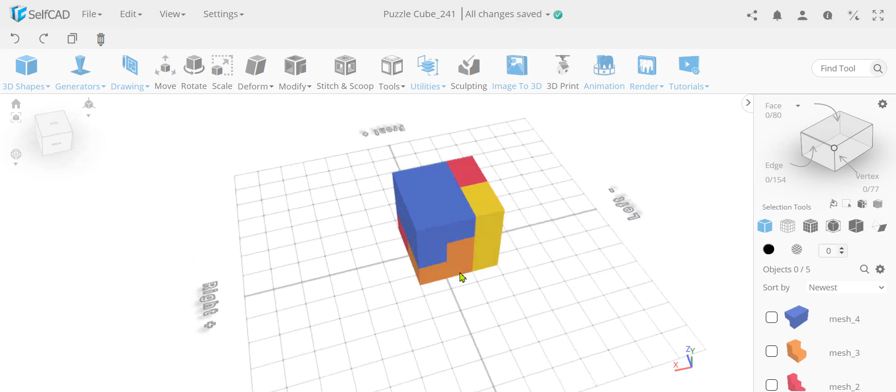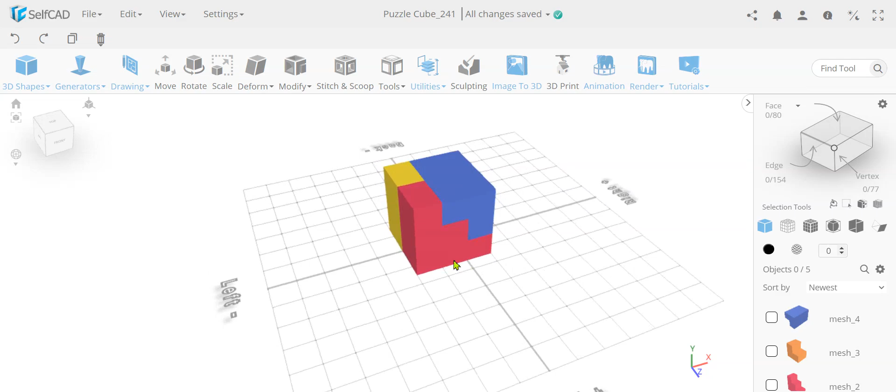So if you can see, this object is made of multiple pieces. Obviously that's a puzzle. You have the blue one which extends both sides. Then you have the yellow one which is just one corner here, one side. And you have this red one which basically extends all the side, this front side, I mean half of the front side basically. And then you have this one over here which is the bottom back side, and so on.

So the main idea is, obviously there's many ways you can do an object that looks like this. It's not a very difficult object, but the advantage of what this tutorial is doing is that it's actually going to create them all using a single profile. And this is going to be really simple. So let me get started.

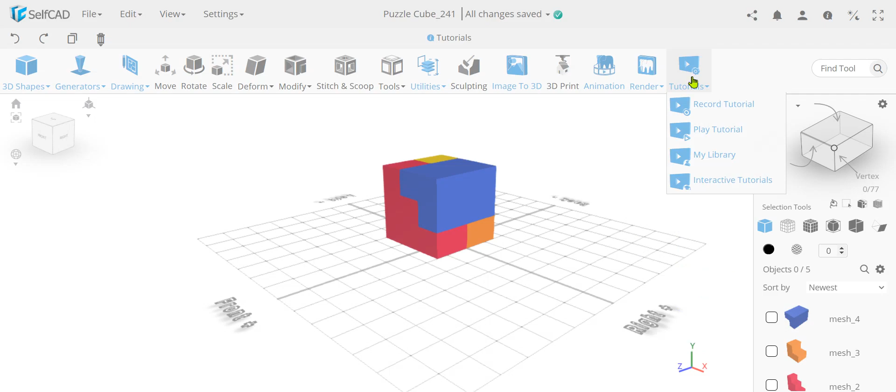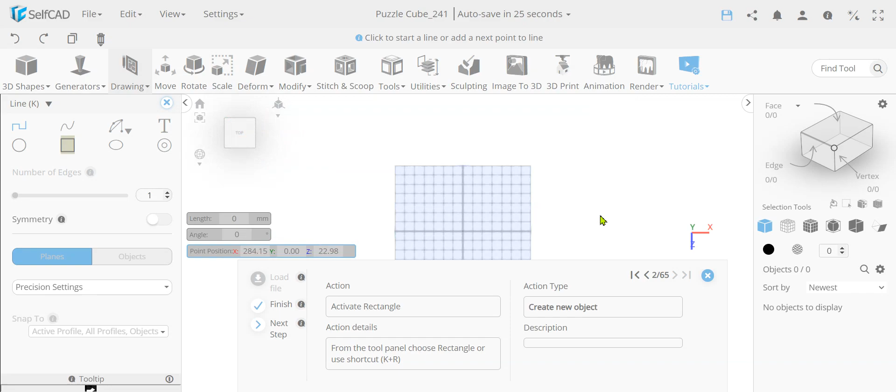I'm going to load this tutorial, click on play tutorial. I've already downloaded this tutorial, so I just need to find it in my downloads, and we start the tutorial. Okay, so we're going to start with a 3D sketch, and as I said, we're not going to use the basic shapes. For this tutorial we're going to use a sketch, but it's a really simple drawing, so it's a beginner tutorial. So the first thing we're going to do is activate the tool that we're going to use, which is a rectangle.

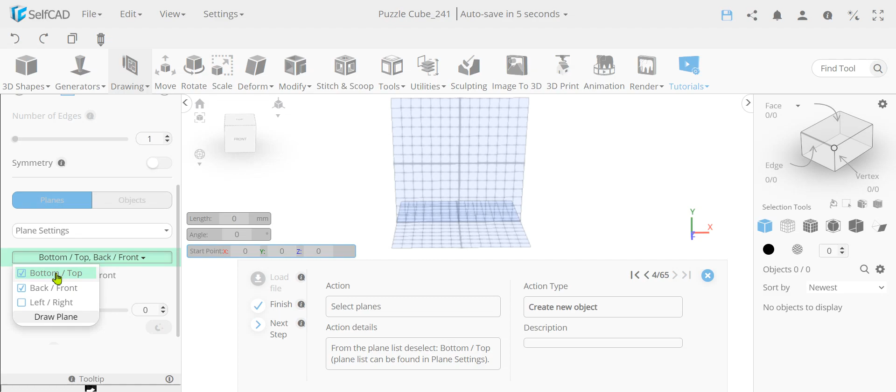And now we're going to set here the plane. What we want to do is draw on the back front plane. With this plane, I already looked at the top down. No, you want to use the front. I'm going to do it over here, and we're going to uncheck the bottom top plane. So we're basically going to use this plane. I can already zoom into this plane.

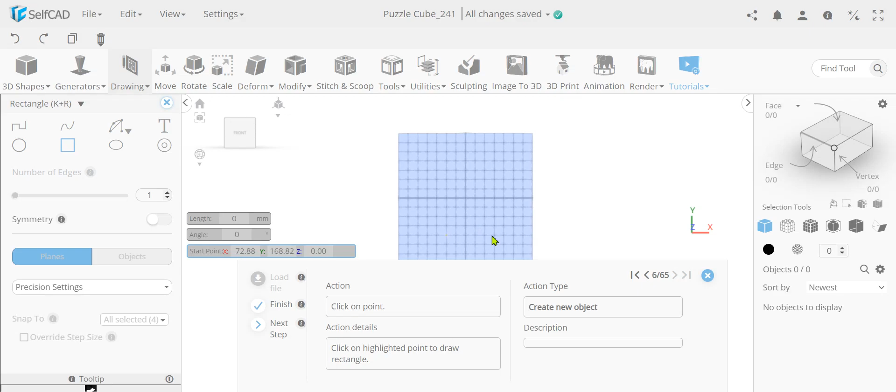And we're also going to change the precision. The default will snap to these three options. We want to add the fourth option, which is the grid vertices, so we will be able to snap to these grid vertices. And now it tells me to find a highlighted point. So I'm going to zoom in. You can see this yellow dot, and this is based on a grid vertex. So we snap over here, which gets the first starting point of the rectangle.

And now we need to snap to this point over here. So you have created this basic shape. Now we're going to draw another rectangle while rectangle is still on. And here's something interesting. We drew a rectangle the other way, but this rectangle overlaps this rectangle. And in SelfCAD, this automatically creates a split over here. So we drew a simple rectangle, but this will automatically split, and this feature will soon be used.

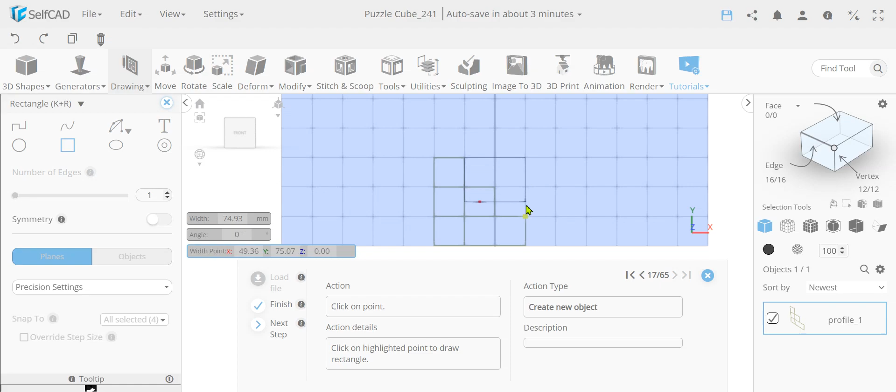And then we're going to draw a new rectangle over here, down to the bottom, and snap all the way here. So we have three rectangles, kind of like a ladder, staircase kind of sizes. And now we're going to draw another rectangle, click over here, and go down all the way over here. So all we did over here is we drew this profile that's kind of overlapping. It's a basic big rectangle that has in it this smaller rectangle, another smaller, another bigger over here, and so on.

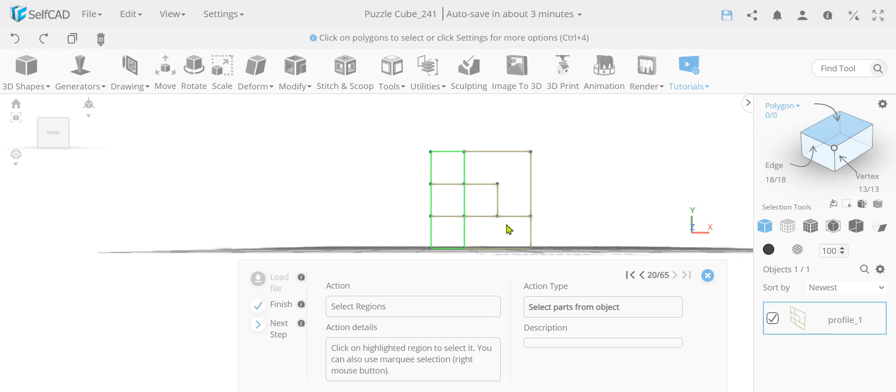Now we're going to activate the polygon mode. Actually it doesn't matter, polygon or faces, in this case they act the same on profiles. And we're going to select just this one side. This is actually what we drew first. I used the marquee selection because the tutorial knows what I need to do, but in reality, if you do this, you will select these lines as well, so you don't want to do that. But we selected what we drew first, and we're simply going to extrude it to create a mesh.

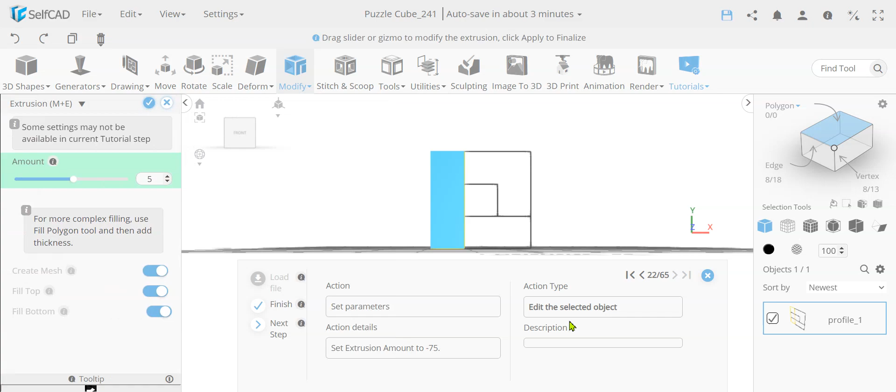But we're going to make them go the other way around, so we're going to make it -75, -75, and this means it goes out this way. And we're going to finalize it.

Okay, so now what we're going to do is simply color it with whatever color design I chose, and we're going to hide this away.

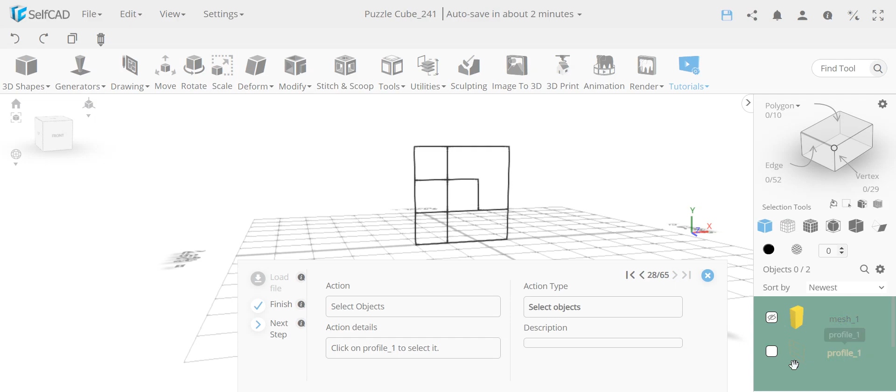Now we're going to select back the same profile we just worked with, and again activate polygon mode, but now we're going to select this entire thing over here, a bigger part of this profile. And again, I use marquee selection, but normally you'll have to use it, or you can select the entire thing and then hold down the control key and marquee select this, which will deselect them.

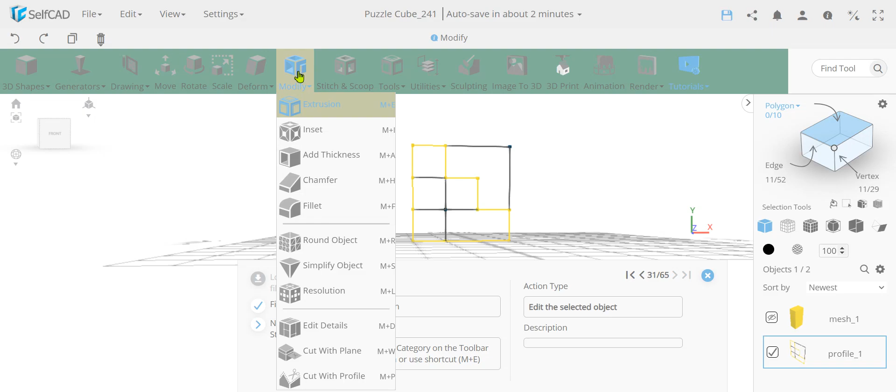And then you're going to go to extrusion again, and now we're going to make it 75 instead of -75, you're going to make it +75. So we're extruding in this direction.

And now what we're going to do is again the same flow. It's very simple. We color and we hide them away.

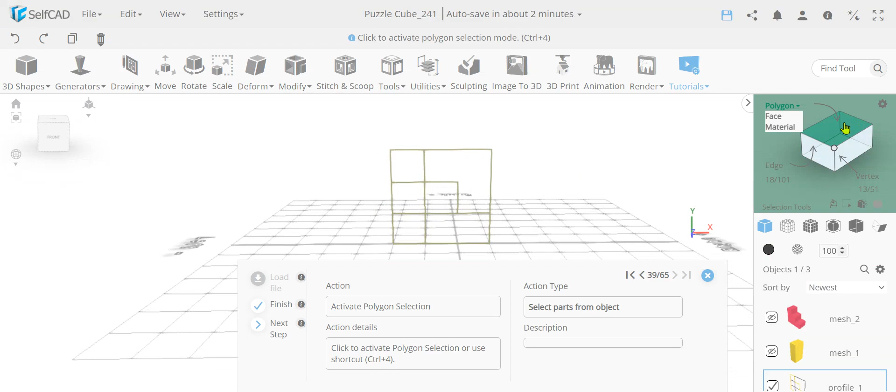Now we select again the same profile and select another piece from the profile, which is this. As you can see, this is really simple, the same flow over and over. It's -75, so we create this piece, and we color it, and we basically hide it away.

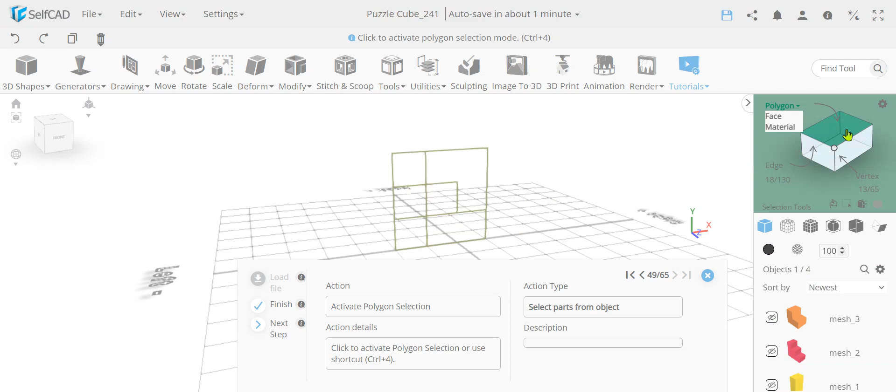Now we're going to select again this profile and select the final piece, which is this, and now we're going to extrude. Here is interesting: we want this blue piece to go across both sides.

So in reality, what we need is a mirror. SelfCAD's actually going to add soon a mirror feature. SelfCAD already added that to add thickness, but in extrusion we don't have it yet. It's going to be added soon.

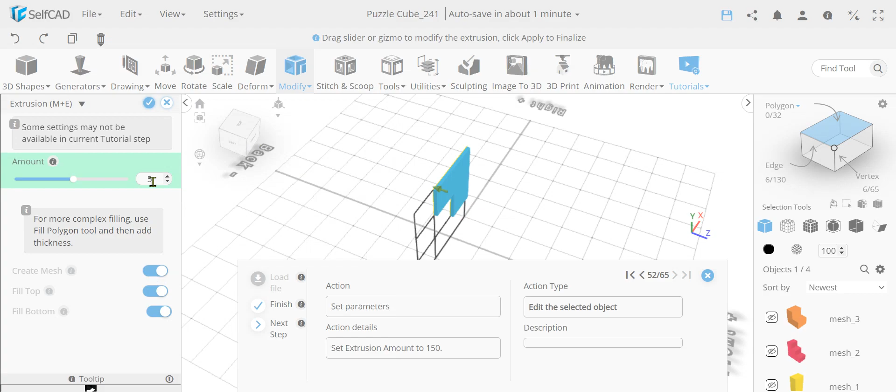So what we're going to do is simply make it 150 and then move it over by half. So make it 150, which is double, 75 plus 75.

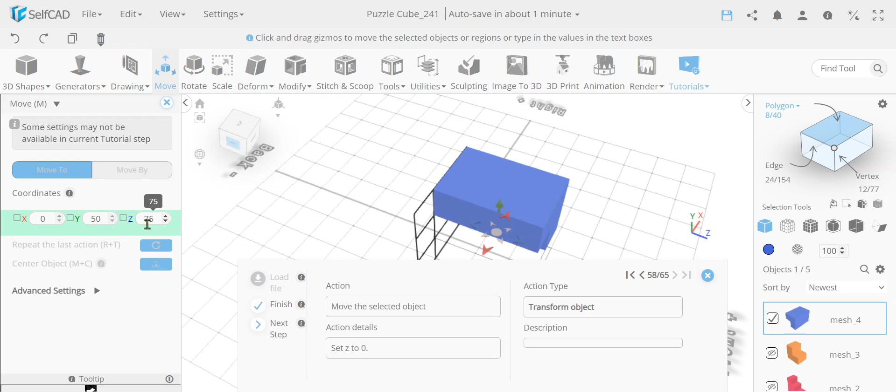We're going to color it and we're going to move it. So instead of moving it by something, we're simply going to zero the Z, which is now 75. If you make it 0, that basically puts it in the center, so it's 75 moved on both sides.

Okay, and now we have to select - let's uncheck this. We're going to select all of these profiles here. Let's see what we're going to do. And this, and we're going to isolate them. Okay, and closing this panel, and that's basically it.

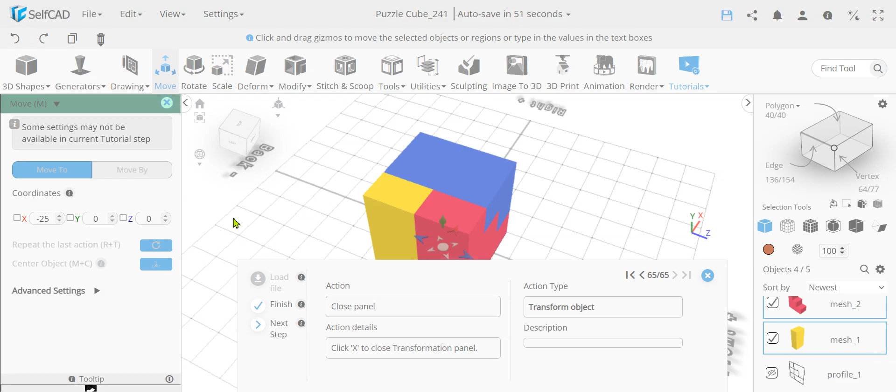We're done. So what you see over here, this is basically all using extrusion. A single profile has just been drawn so that it has these cuts.

Now the reason this is working, if I'm going to hide this away, you'll see the reason this is working is because these profiles, which we intersected, are actually made to behave separately. See, this is now one piece.

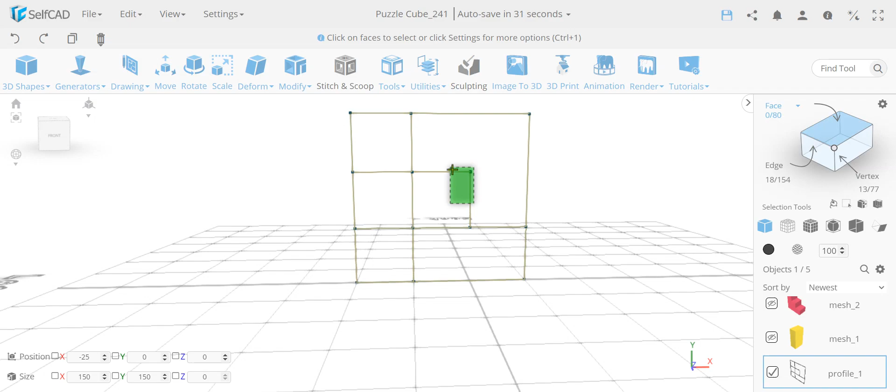We added these vertices over here, so they're all independent, and then if you tell the extrusion whichever part you want it to extrude, you get this part. So I can tell it, for example, to extrude this part, we will get this section, and the extrusion actually will ignore the rest.

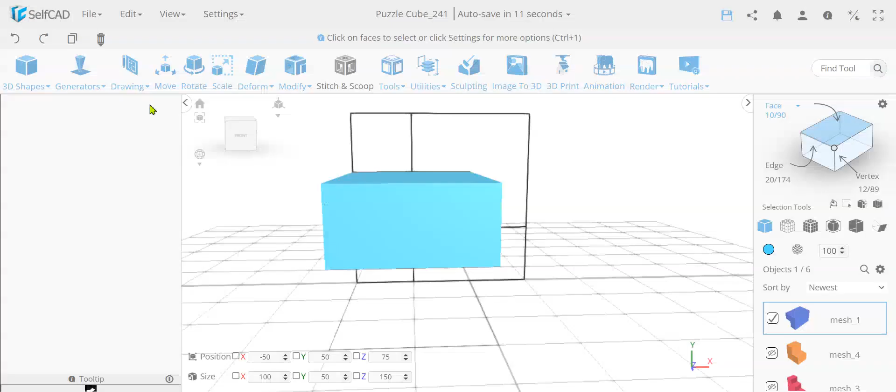For example, if I do it this way, extrude, let's see what will happen. It actually does the entire thing, but actually will give me this line. So the line's not ignored, it just adds a split.

And this is the way SelfCAD allows you to use more advanced features, where you can sometimes add the line to later use to modify the mesh and so on. But in this case, we did not need to do that.

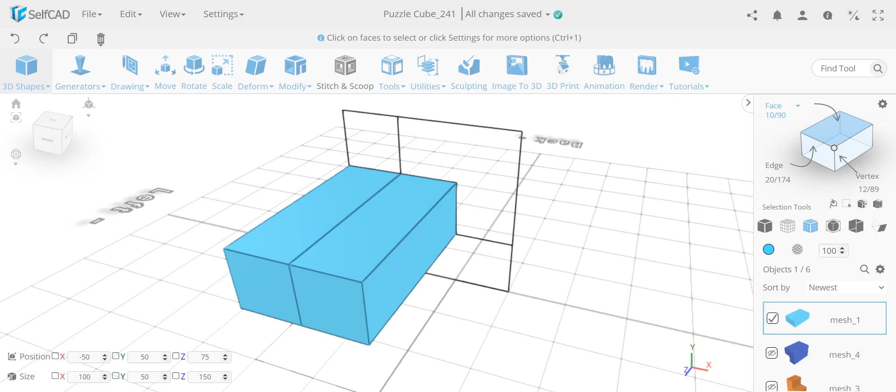It's a really simple basic tutorial. So we didn't modify anything, we didn't care about the inner lines. We just used the single drawing to get all of the pieces.

And the final piece was just mirrored, but because we still lack the mirror feature, we just moved it.